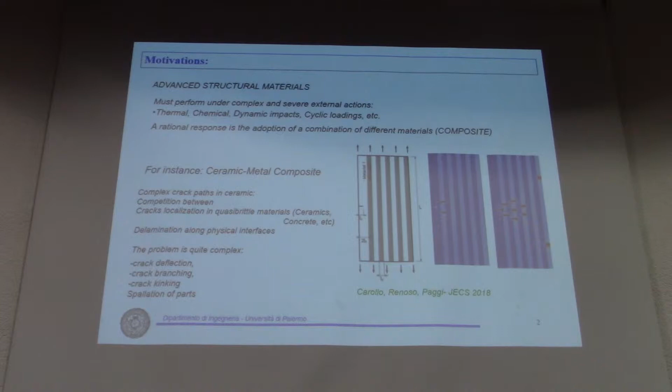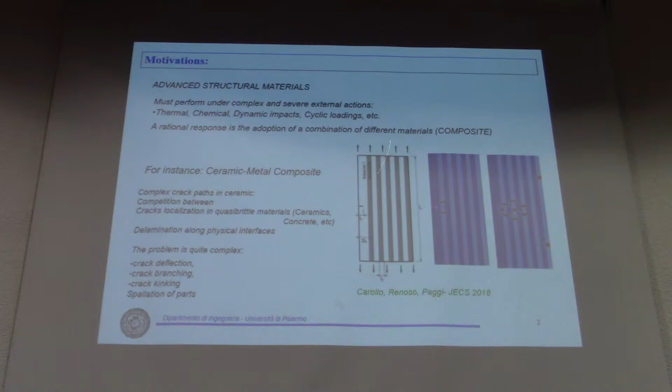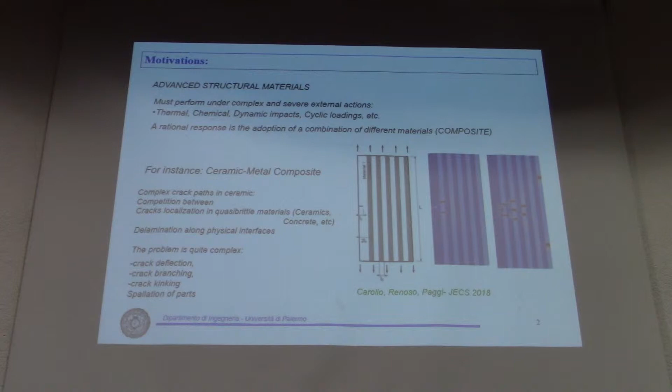In order to perform well in this very complex loading condition, we have to combine different materials, such as composite materials, for instance ceramic-metal composites. In this part we can see layers of metals and ceramic materials, and the complex failure mechanisms are really related to debonding and strain localization, fracture kinking, and many other complex phenomena that have to be taken into account.

In order to model this kind of problem, we typically have two main failure modes. One is the diffuse inelastic strain or formation of localized failure in the bulk materials, which may bring to localized fracture. The other is the decohesion along the weak surface, which typically connects the different parts of the material.

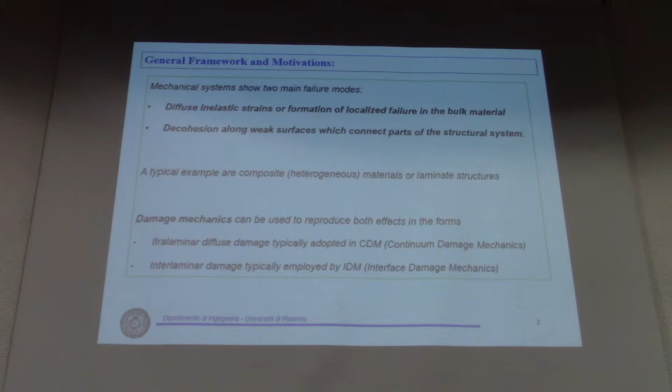The common approach can be based on damage mechanics, but it has to be used in a different way in order to have these two different effects. One is the intralaminar diffuse damage, and this can be faced with continuum damage mechanics, but with some special rules in order to keep the problem well posed. And the interlaminar damage is typically modeled by interface damage mechanics.

So we have a continuum problem where elastic damage in a quasi-brittle material develops. This is the formation and propagation of microvoids and micro-ruptures, diffuse inelastic strain up to the maximum strength, followed by a softening branch. When the softening branch starts, we have to take into account the induced localization feature.

Concerning this, it can be found with the non-local damage model, as presented many years ago as a general problem.

Concerning the surface, we can introduce an interface model in a multi-scale approach, and the main feature of this model has to be the capacity to model adhesion between bodies and fracture propagation along a known surface, frictional effects between rough surfaces and sliding contact, and also, once the crack is opened, the unilateral contact between surfaces in a complex loading pattern.

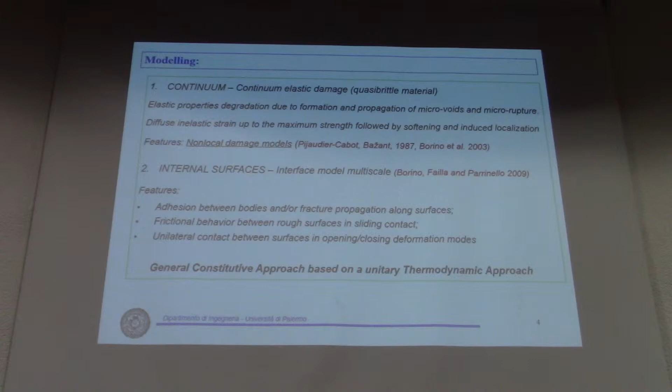So the problem can be set in a very rigorous thermodynamic way. Taking this as the body, we can distinguish internal free energy density per unit volume in the bulk parts, and internal interface energy along interfaces. For each of these parts, we need to introduce the related state variables and internal variables in order to model the problem.

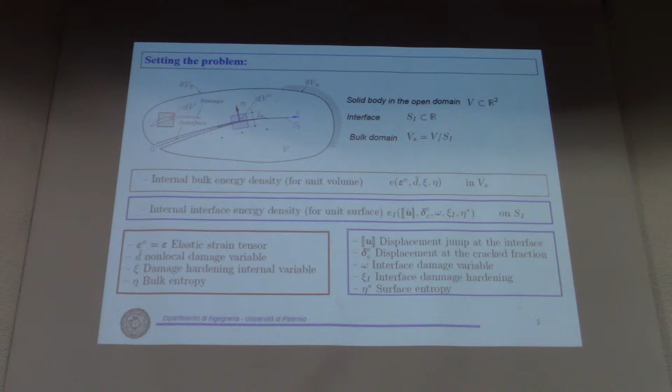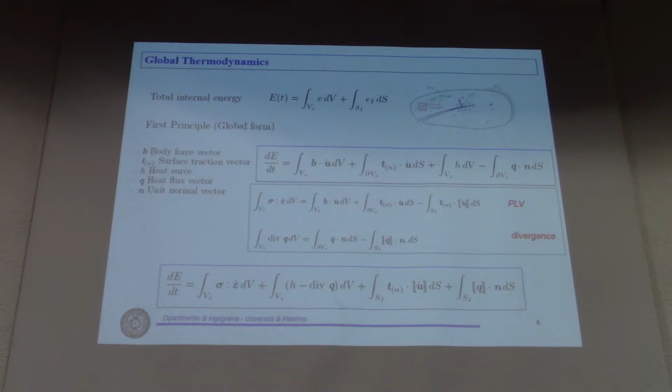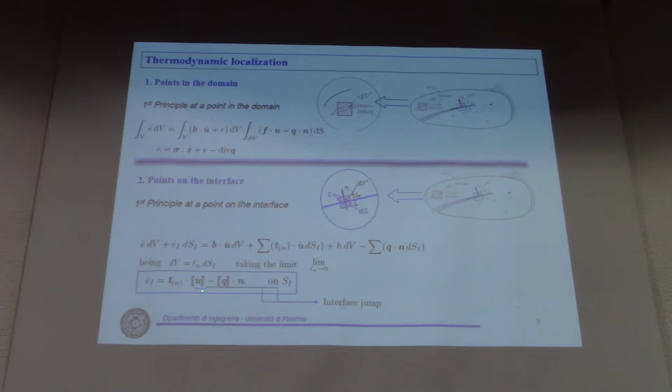Then we have to localize the law with reference to points which are inside the domain or points which are on the surface. When we do this localization, we arrive at the point-wise first principle in this part, and this is also related to thermal flow. At the interfaces, where there's a jump in displacement, this can also be considered.

Related to the second principle, when we use the bulk part, we have possible localization, and in order to preserve a well-posed problem, we have introduced a non-local approach, which means energy exchange between points. So it's not a simple material that we are considering.

Then the second principle, once again, is written with reference to the active zone. But when it goes into a local form, we have to introduce some special terms, called the non-locality residual function, which takes into account energy exchanges between neighbor particles. Because the system is closed, we also introduce a general insulation condition.

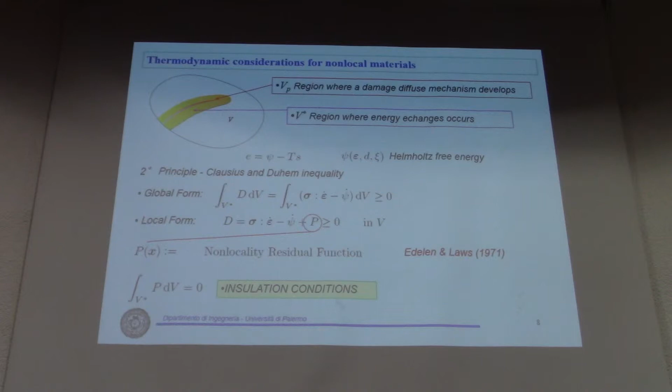The Helmholtz free energy is reported here, still for this part of the problem. We have the strain energy, which is the decomposition in the principal direction space in order to have the monolateral behavior of quasi-brittle materials, and also a hardening rule, with the internal variable reported here.

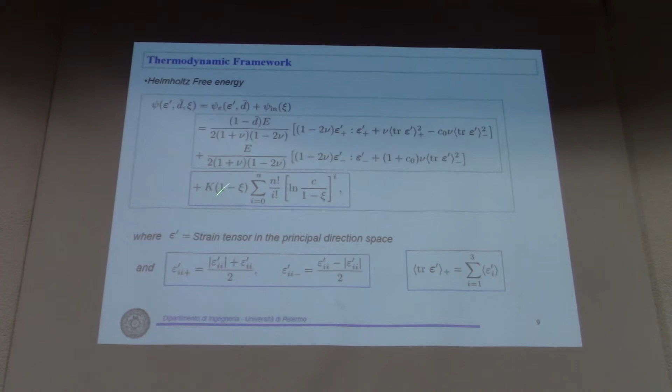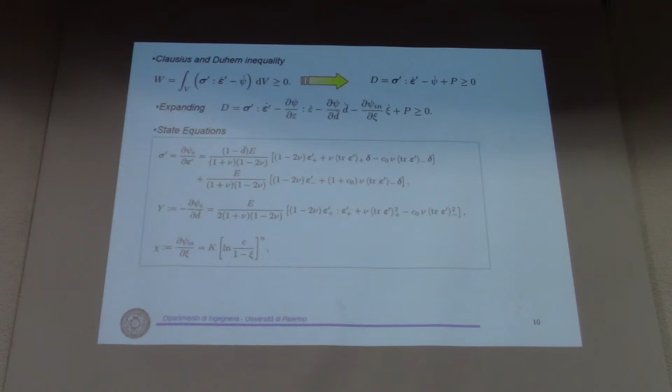The state law can be derived using the standard procedure of continuum thermodynamics, and we have the constitutive law in terms of stress and strain in the principal direction, the energy release rate reported here, and the internal variable which drives the hardening behavior. The important thing in the non-local approach is that the energy release rate also has to be computed following a space averaging.

Dissipation comes in this way, and then we have the non-local damage flows reported here. So what we have is that in the activation damage function, there is a value of the energy release rate which is not pointwise, but an average in the active zone.

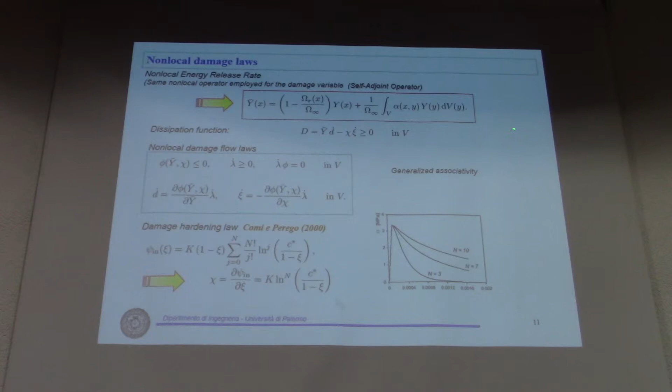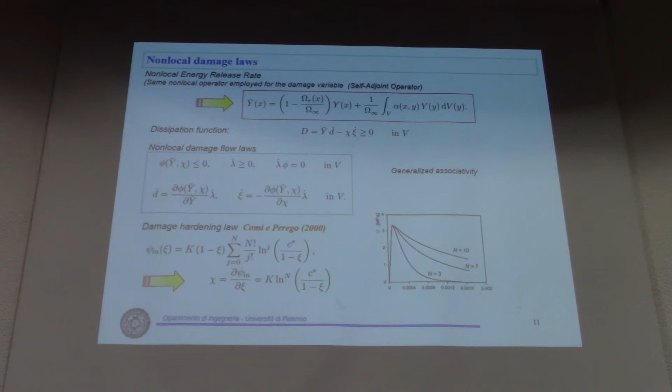So the damage hardening law that was shown before is something like this, and was proposed by Comi and Perego, and has the capacity to go to infinity while keeping the area, the integral, finite, which means finite fracture energy.

Concerning the interface, we have to model adhesion between bodies, friction between rough surfaces, and unilateral contact. We can approach this feature using an integrated interface approach, in which all these features are considered, and we can also model a smooth transition between cohesive and frictional behavior.

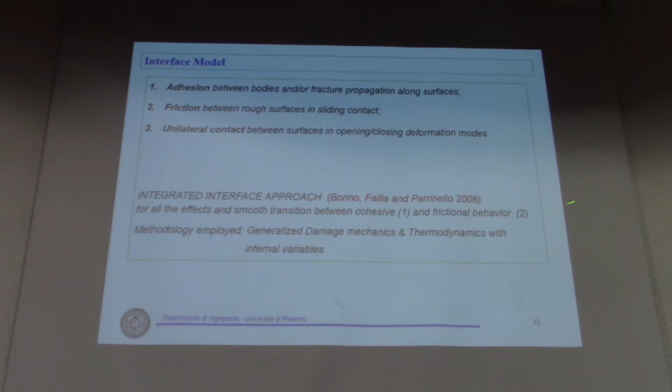The methodology applied is generalized damage mechanics and thermodynamics with internal variables. Here we have the main feature of the model: the damage variable, which is considered not just for describing stiffness degradation, but it's also a geometrical measure of the fraction of the sound area. So if we take a little piece of the process zone, we can obtain two fractions of this part.

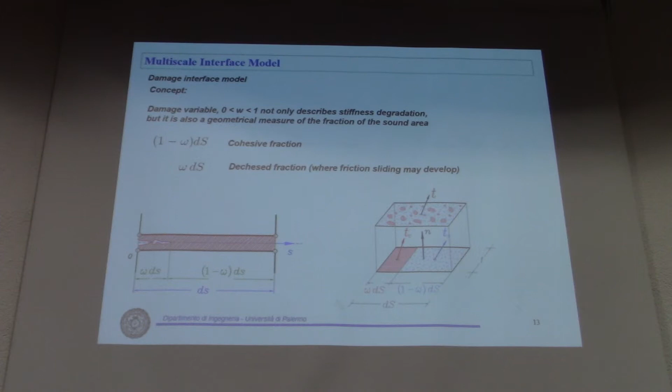One is the sound fraction, the other is the damaged fraction. With these two fractions, we have also, from a static point of view, two different traction vectors. So this is, as we said before, a real multi-scale approach, because this is the structural scale situation. This is the cohesive part, this is the sound part, this is the process zone. And taking a point of the cohesive zone, we have again two fractions.

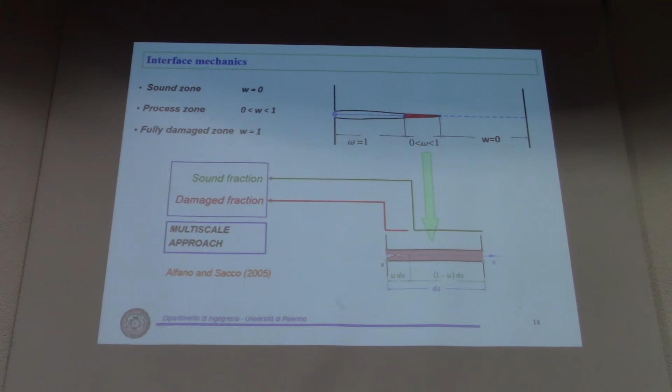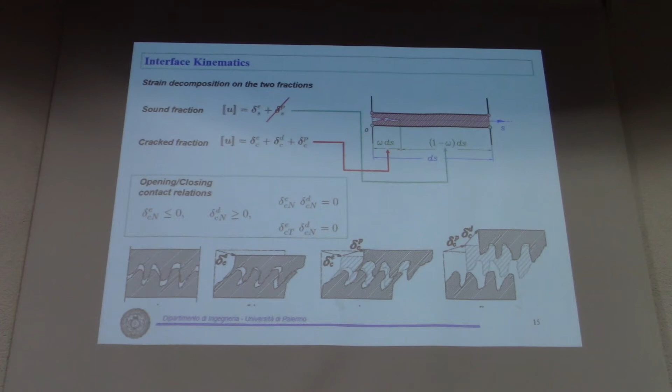Two parts, two fractions, here reproduced. So the strain decomposition is done for the two different parts: one is the sound, the other the cracked fraction, where we have different components that describe the friction, the cohesion, and also the dilatancy of the structure, all considered together. Looking into the statics, we have the composition of the traction vector, and the traction vector has two components related to the sound fraction and to the cracked fraction.

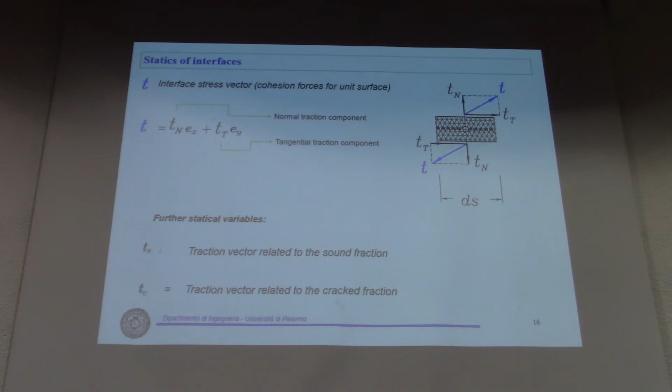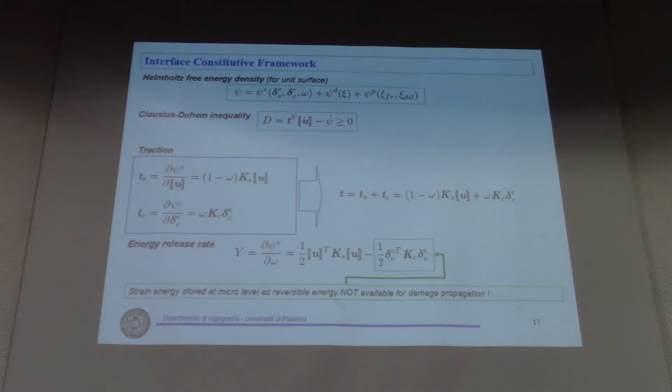Again, we can use a thermodynamics approach here, reporting the state law. But the most interesting thing in this model of interface is that the energy release rate has not just the usual term, but there is another term here with a minus, and this represents the energy stored at micro level, as this energy is not available for damage propagation. It can trap in the material.

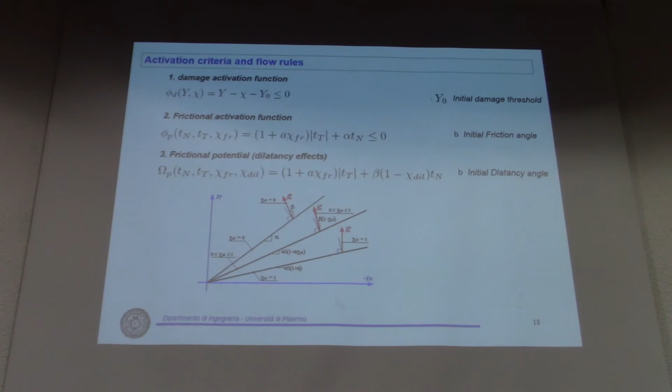Then the activation function: damage activation, the frictional activation function, and because of the dilatancy effect, a potential function. These are in the form of the Mohr-Coulomb expression. The formulation is completed by the flow rules here reported.

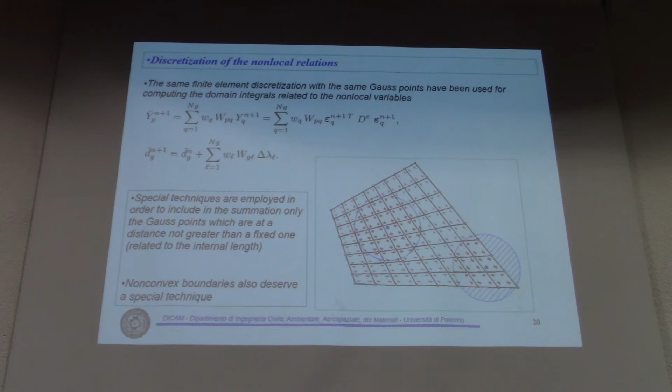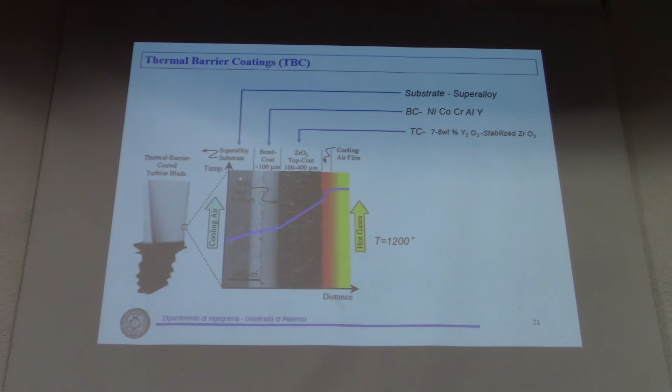This was the first application of this coating. So, as we see, the problem is really complex. Many effects are involved in this problem. So this is the superalloy, which is the structure, the real structural part, and then there is the top coat. The effects that have to be considered are of mechanical nature, because there are, of course, mechanical actions, thermomechanical because of the high temperature transition, and thermochemical, because chemical effects are also considered.

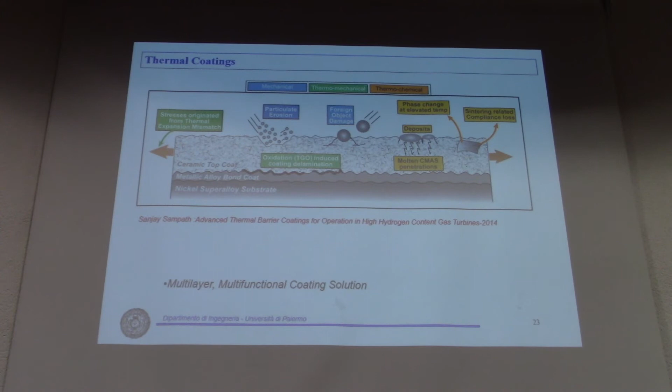The most important of that is oxidation along this interface, which is a proper zone where delamination fracture can develop. So it's a multifunctional coating solution here reported.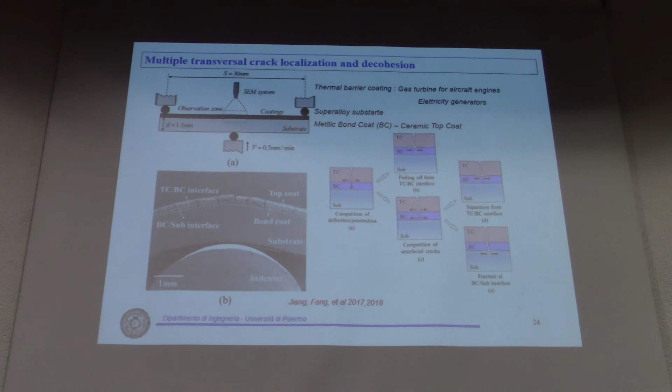This fracture can go through the thickness of the coating, then reach the bonding coating on the substrate, and then it's almost impossible to still propagate in the superalloy, and then delamination may start. So the point is, these are the formation of these cracks, and the length between one and the other can be computed.

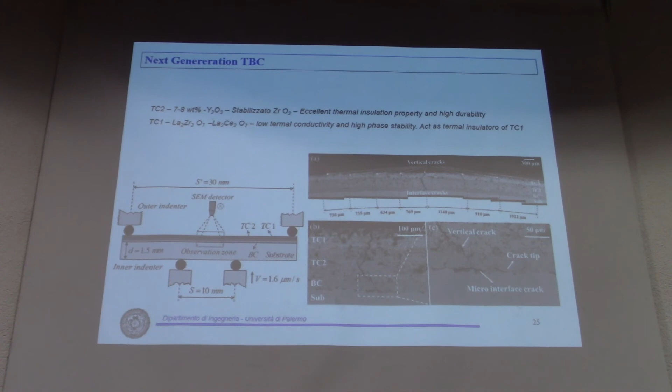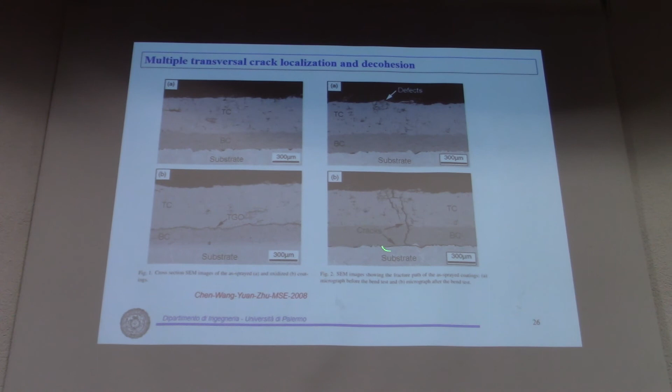Then this is another experiment of the same type, maybe more complex. It's a 4-point test, but the situation is more or less the same. And we can have a detail of the formation of these vertical cracks, and then the delamination along the substrate and the coating.

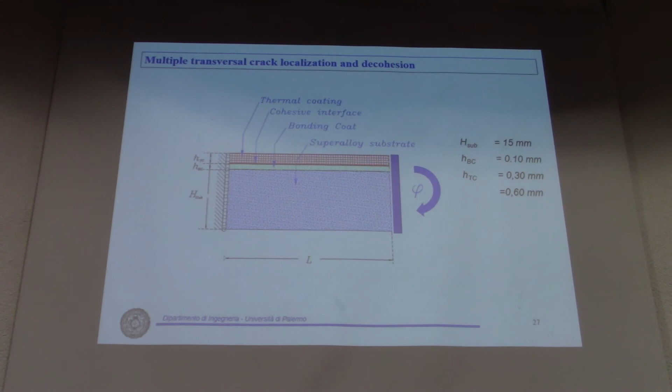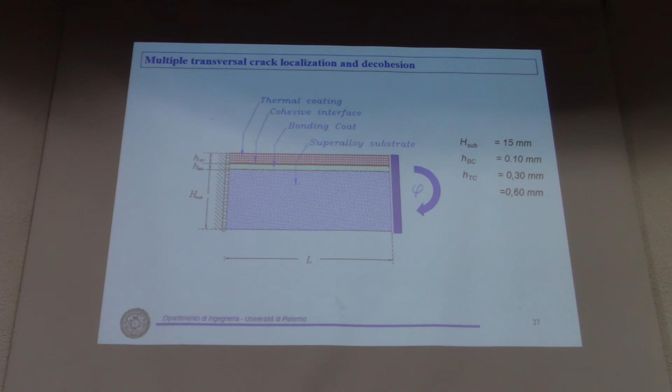So the problem that we analyze for this kind of situation is here reported. We have an element with these three parts, and then an interface which is posted here. We have done two analyses, because they are really two different kinds of failure mechanisms: one with a relatively thin coating, and the other one with a thicker one. And this is a pure bending state.

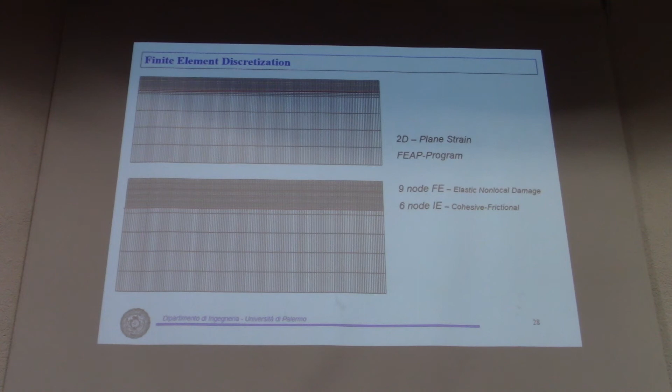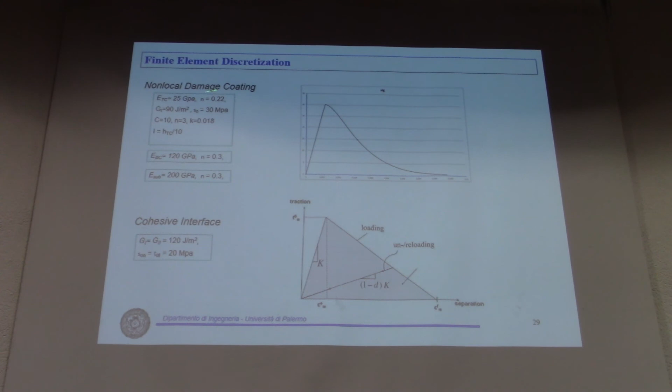This is the discretization that we have adopted. In the red line is the interface, which keeps inside the information about the possible delamination between the two materials. Going to the material properties, these are taken from the literature related to this problem. Nonlocal damage is this one, and the cohesive is bilinear.

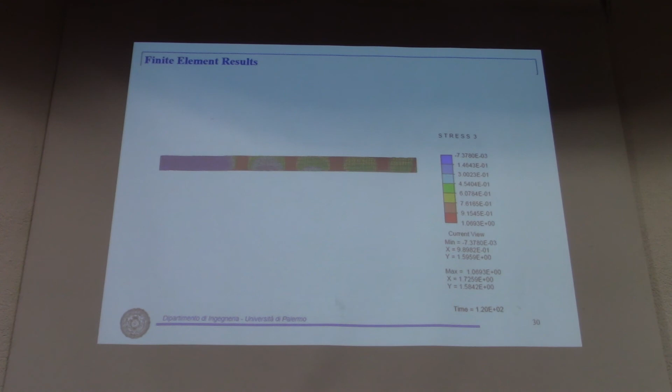And these are the finite element results for the thinner coating. So it starts uniform, then the first localization starts. This is just the thermal loading. Then the others are produced, and it goes like that.

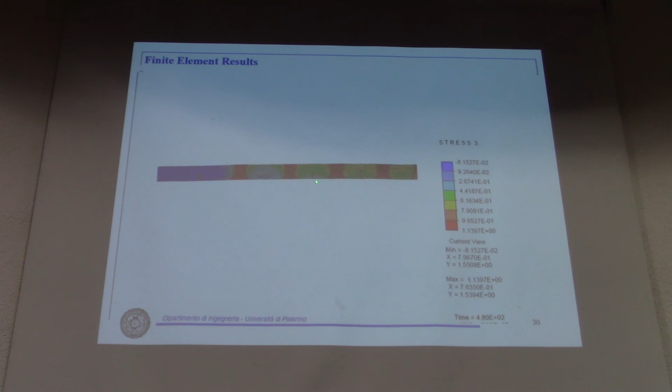And then other fractures start from the bottom, from the delaminated part, and this is the fragmentation, the spallation of the part.

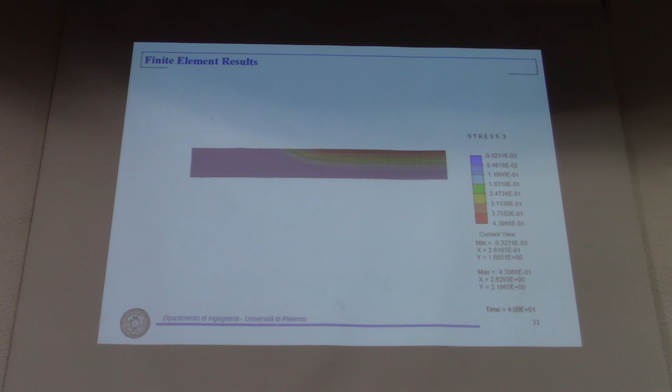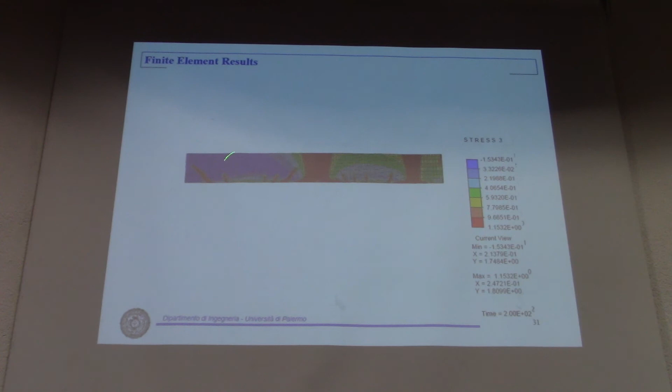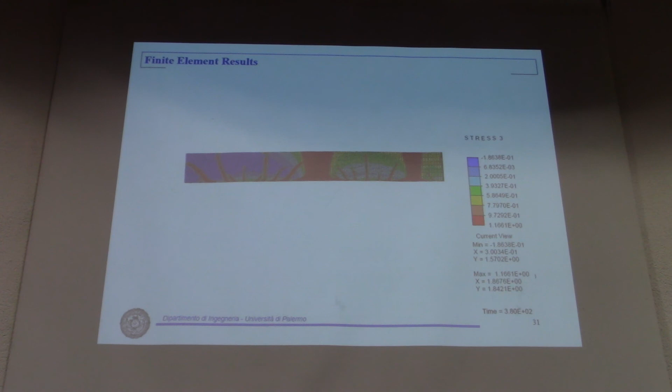The second analysis is the thicker one, and the situation is more complex. Again, the formation of this large zone, but then, because of the thickness, we have inclined fracture that starts from the bottom, and in this case the spallation of this part is more pronounced, as is described by the experimenter.

So, as a conclusion, we have to consider that this problem has two main features: the fact that the thicker the coating is, the better the protection, the thermal insulation is. But in this case, we have some problems from a mechanical point of view.

Of course, the problem would require a more sophisticated multi-physical model which takes into account all the other effects that in this preliminary phase have not been considered, such as temperature and chemical effects. Thanks for the attention.